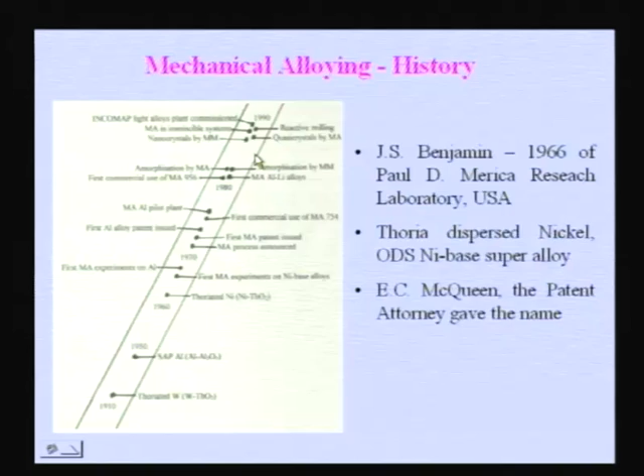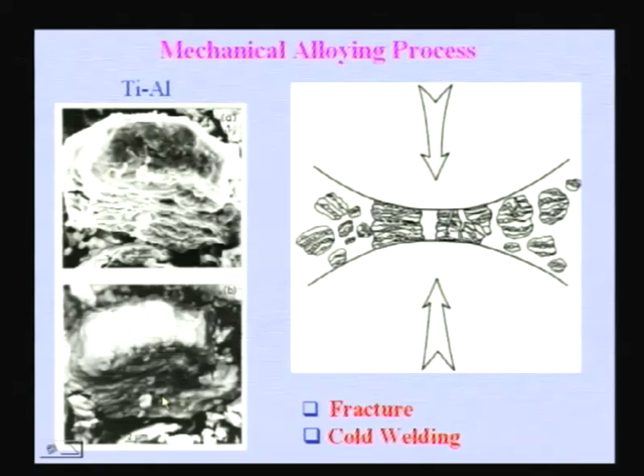Okay. So, this is how we can find out that there are different elements and alternate layers of these elements take place. And once you get that kind of things, alternate layers, any phase can form. We will come to what are the phases that can come out of such a mechanical alloying. Before that, let us look at what are the types of mills that we use.

One is called a vibratory mill. These are typical laboratory mills. There are two laboratory mills which people use usually. One is called a vibratory mill, which is where basically you take a box in which you put the powder and the balls and then shake it at a very high speed, something like 20 cycles per second. So, almost about 1200 RPM if you want to convert it into an RPM. So, you can have such high frequency impacts, because in each vibration there will be one impact at least. So, balls impact the powder.

So, this is a commercial ball mill called Spex mill. This is an American mill which is very often used, but the only problem with this mill is the quantity of the powder that you can use is very small, not more than about 20 grams. So, if somebody is interested to make slightly larger quantities, he cannot use this kind of mill.

The next ball mill which is very popular is what is called a planetary mill. This is one such planetary mill where you see a disc. The schematic picture is shown here. You have a disc there. This black one that you are seeing here is a disc, and on that you see 4 white colored jackets, and these are called bowls or vials, and these bowls rotate in a direction opposite to that of the disc. The disc rotates in one direction and the bowls rotate in the opposite direction, and that is why you can see the disc is rotating in this direction.

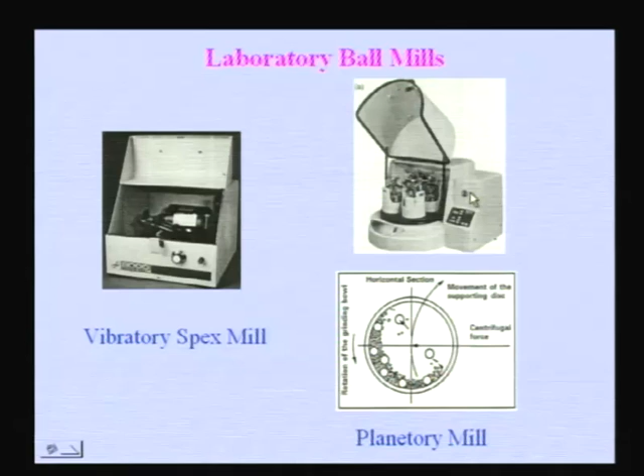So, whether we can use this kind of mill to produce either nanocrystals or amorphous materials or not is what people are studying nowadays. In fact, within 15 days we have a small workshop just to discuss whether we can produce commercial, large-scale ball mills where the energies can be as much as you can put into these laboratory mills, and if so, how to design such a ball mill where similar energies can be imparted. So, hopefully people will come up with some idea.

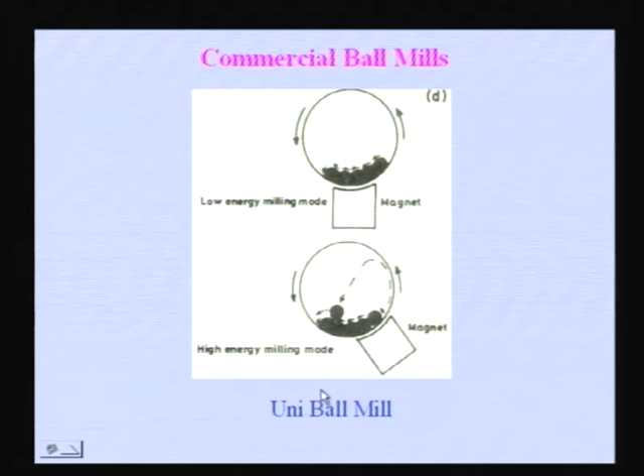So, the other type of ball mill is what is called a uni ball mill. This is a special type of ball mill which is different from the other ball mills, in the sense that here the actual energy is imparted because of the magnet which is kept here. So, you have a tumbler kind of mill here, a circular or cylindrical shaft in which you put balls, and you put a magnet here.

So, now depending on where you place the magnet, you start rotating the container, and the balls are taken to a higher position depending on the position of the magnet. If the magnet is exactly at the bottom, then the balls will not go very high, because the magnet is attracting these balls, which are basically steel balls. So, they will keep on moving there itself, and there is not much impact, but only some shearing process will take place.

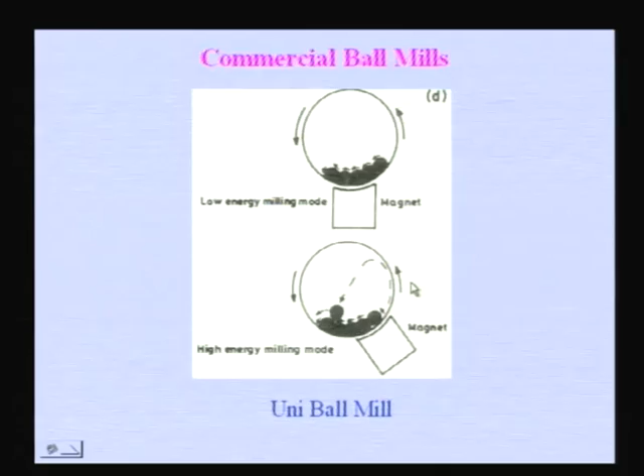So, one can control the mode of energy transfer, whether it is just shear or an impact kind of energy, by changing the position of the magnet, and that is why we call this a low energy mode and a high energy mode. If you put the magnet at some position here, let us say, you will get much higher energy. So, either shear mode or impact mode. Here also one can produce large quantities, at least about 5 kilos or so. So, these are the typical types of mills that we use.

And now, let us come to what you can achieve by this kind of mechanical alloying or milling process. Basically it is a defect induced process. You are breaking the powder particles into finer and finer particles, and during this fracture process you are introducing a lot of defects such as dislocations and vacancies, and because of these defects, phase formation or phase transformations are enhanced, because the diffusivity is enhanced.

In fact, people talk in terms of a special type of diffusion called pipe diffusion. Have you ever heard of pipe diffusion? If you have gone through a diffusion course, you would come across this. A pipe diffusion is a diffusion through dislocations. A dislocation is what? It is nothing but a row of vacancies, isn't it?

So you can imagine a dislocation as nothing but an empty pipe. It's like just a cylinder which is an empty cylinder, like a tube. So you can imagine a dislocation as a tube, where the diffusion can occur very fast. So if you have a large number of dislocations inside a material, diffusion can occur very fast.

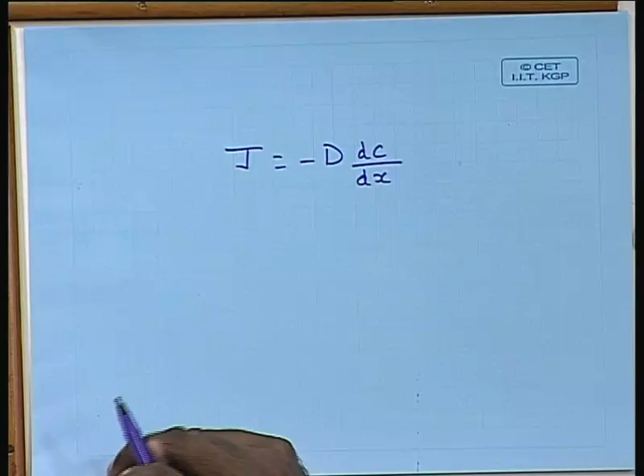So diffusivity depends on the temperature, we all know, and also the concentration, of course, because diffusivity we can think of as concentration dependent or concentration independent when we try to calculate it. All of you have gone through a diffusion course at some point of time, or some metallurgy course where you must have come across diffusion. Anyway, Fick's laws you must be aware of.

So basically people take diffusivity as temperature dependent, where D is equal to D naught into exponential minus Q by RT. So where temperature comes into picture, Q is called the activation barrier for diffusion and D naught is what is called the pre-exponential factor. So now dC by dx is very crucial in this kind of situation.

When you are decreasing the size, let us assume that in a ball milling you are forming alternate layers like this, A and B. If you are doing continuous milling, the thickness of A and B keeps on decreasing, because there is continuous breaking and rewelding taking place. Because of this continuous thickness decrease, the dC by dx increases tremendously, because the dx is decreasing.

As you can see, the dx is nothing but the diffusion distance, the distance over which diffusion has to occur. In a layered structure like this, the diffusion has to occur in this thickness, isn't it? So if that thickness can be reduced, then dx is decreased, and if the denominator decreases, the whole fraction increases tremendously, and as a result the flux increases.

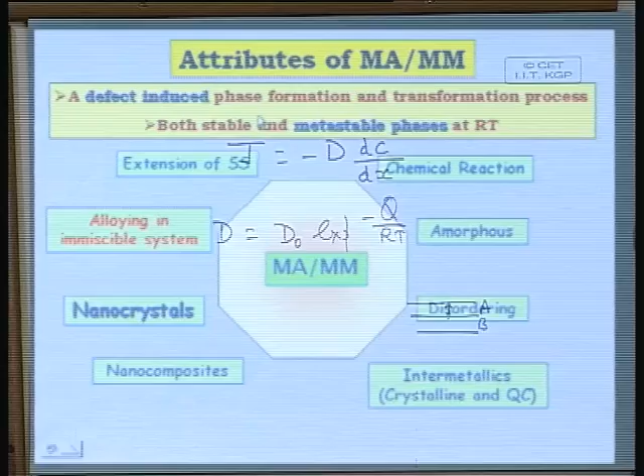So that is one of the reasons why you have defect induced phase formation and transformations, which get enhanced because of the defects and the decrease in the size of the crystals during ball milling. And because of this, you can have stable phases and metastable phases forming at room temperature. This is very crucial. All these phases are not happening at high temperature, they are happening at or close to room temperature.

We will talk about the temperature during ball milling at some point of time. Okay, so you can take it for granted that the temperature is more or less close to room temperature. So all these processes occur near room temperature. So what can happen?

As I told you, it can give you nanocrystals, and it can give you nanocomposites if you are putting in more than one type of material. For example, if you take a nickel based alloy, nickel and yttria, you can break it to a very fine size, and ultimately if the energies are high enough, you can make a nanocomposite of nickel into which you have yttria.

So you can make nanocomposites, and you can have what is called alloying, and because of that alloying you can have extension of solid solubility. In rapid solidification processing, we have talked about extension of solid solubility. Similarly, here also we have extension of solid solubility. In rapid solidification processing, the concept which tells you about extension of solid solubility is the T0 concept. We have talked about the T0 concept.

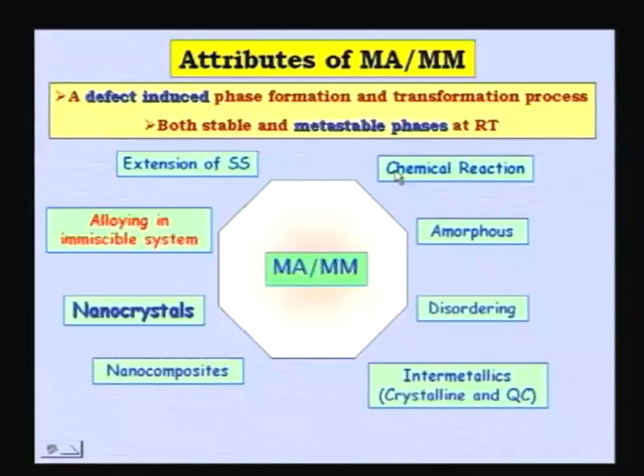So if you want to introduce some ductility into a compound, you can take an ordered compound and put it into a ball mill; one can make it disordered, one can make it completely amorphous, and one can also introduce chemical reactions. So these are all things one can do, and these are some of the examples.

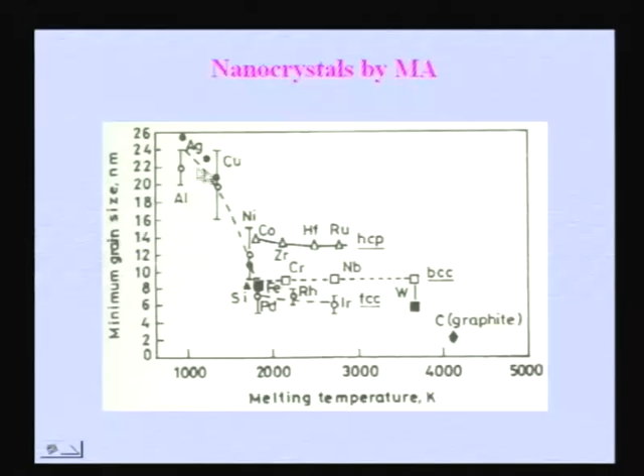Nanocrystals one can make. This is in the metallic system, this is in the oxide system, PZT, and the crystal size that you can achieve by mechanical alloying is always a function of melting point. The higher the melting point, for example graphite and tungsten have very high melting points, the lower the crystal size one can achieve. Whereas if you take aluminium, copper, silver, they cannot have very low crystallite size. You have a high crystallite size.

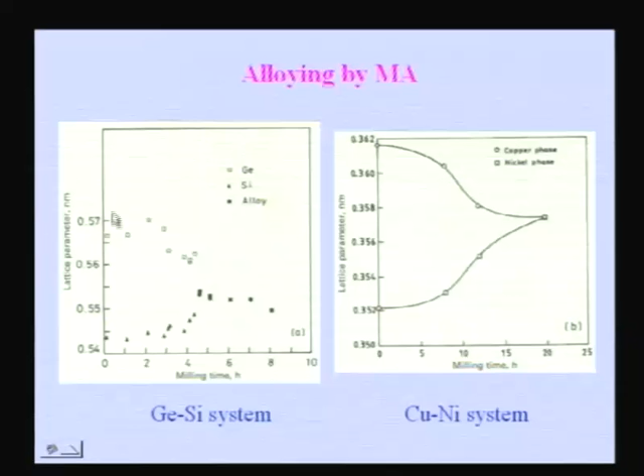Similarly, this is germanium silicon: this is germanium, this is silicon, one increases, another decreases, and finally you get an alloy. And this tells you how much solubility you can achieve. This is iron copper. Iron copper is supposed to be an immiscible system. A lot of people are working on these immiscible systems now, particularly to put a small amount of copper into iron. In interstitial free steels, a lot of people want to put small precipitates of copper, particularly nanocrystalline copper, into iron, so that they can increase the strength of the interstitial free steels.

So if you look at the equilibrium solubility, it is only 0.3%. Only 0.3% of iron can go into copper under equilibrium conditions. By rapid solidification one can go to 20%. By evaporation 35%. By sputtering about 50%. By mechanical alloying one can go to 68%.

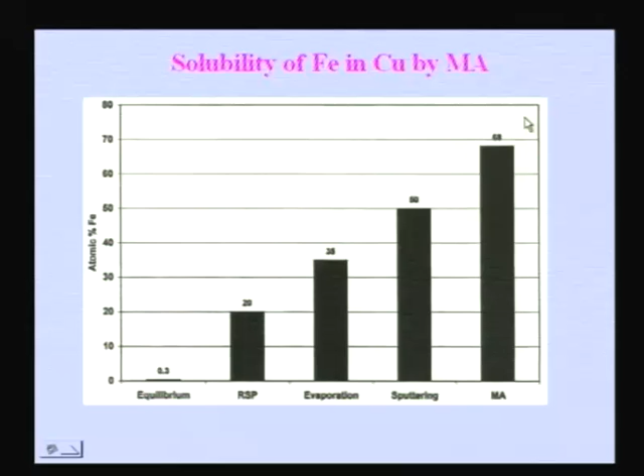You can imagine from 0.3 you are going up to almost 68%. So this is all because you are just forcing the atoms to come together. So that's an advantage of mechanical alloying. And similarly, I told you earlier, nanocrystallization is a prerequisite to alloying. We have talked about it when we were talking about nanocrystals. I thought we will just bring it here because this is something to do with mechanical alloying.

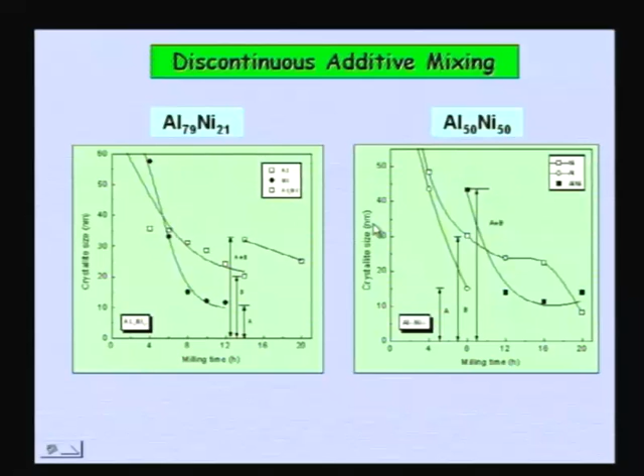So, this is another mode of alloying which occurs during mechanical alloying in case of ordered compounds, not for solid solutions, but in case of ordered compounds with high negative enthalpy of mixing, you get this kind of discontinuous additive mixing. And one can have extension of phase fields in the intermetallics also. We talked about extension of solid solubility in solid solutions, but one can have extension of solid solubility in intermetallics.

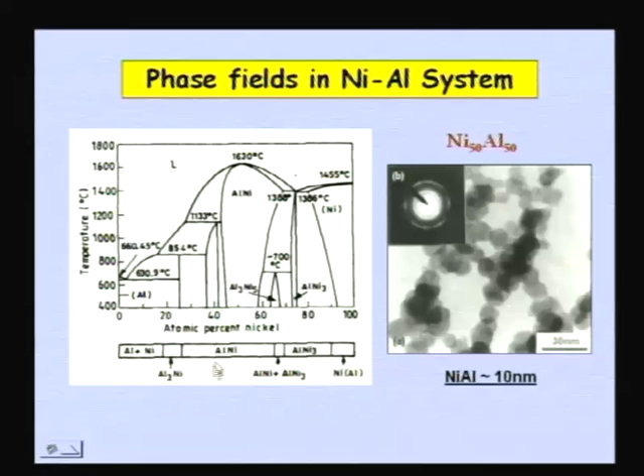For example, NiAl is one such example, where under equilibrium conditions you get a solubility from 45% to 55%. Here you can get from 25% to 65%, a very large extension, and it is all because of nanocrystals. And one can show that when you make it nanocrystalline, the phase field becomes much larger. This is very easy to show.

And one can introduce disordering, but the extent of disordering that you can introduce into ordered compounds depends on the ordering energy of that compound. How ordered is that particular order? If you compare some intermetallic compounds, for example, let us take beta brass. Beta brass is ordered at room temperature; if you start heating it, once you cross a particular temperature, what temperature is that? About 450 degrees centigrade, it becomes disordered.

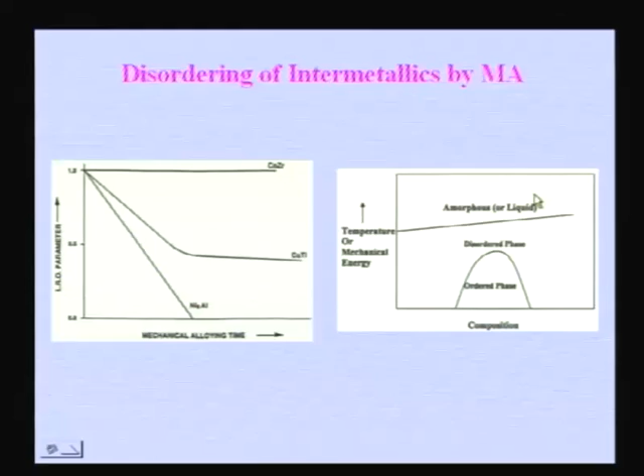So, similarly here there is an analogy between the temperature and mechanical energy. If you keep on increasing the mechanical energy, the ordered phase becomes disordered, and this disordered phase, if you keep on increasing the mechanical energy further, becomes amorphous, which is similar to the liquid. So, this is similar to what happens if you keep on increasing the temperature: an ordered phase becomes disordered and becomes liquid. Instead of liquid, with mechanical energy it becomes amorphous. So, that is one way one can do it.

And one can talk in terms of what happens when you put these powders into a ball mill and look at how various milling parameters affect the type of phases that are forming. This is one such example which tries to show you different milling parameters in ball milling. One is the speed of the mill, the RPM, and the ball to powder weight ratio. So, if you are increasing the speed of the mill, definitely you are increasing the energy, isn't it?

And if you are increasing the ball to powder weight ratio, that means for the small amount of powder, if you have more number of balls, then the possibility of a ball hitting another ball increases. That is one possibility. At the same time, there are less number of powder particles which receive impacts. So as a result, the possibility of each powder particle receiving more impacts also increases, and because of which the total energy transferred to the powder over a period of time increases. As a result, the higher the ball to powder weight ratio, the higher the energy transferred.

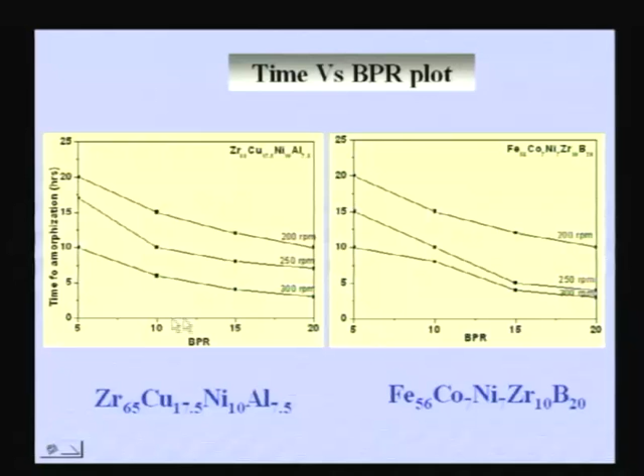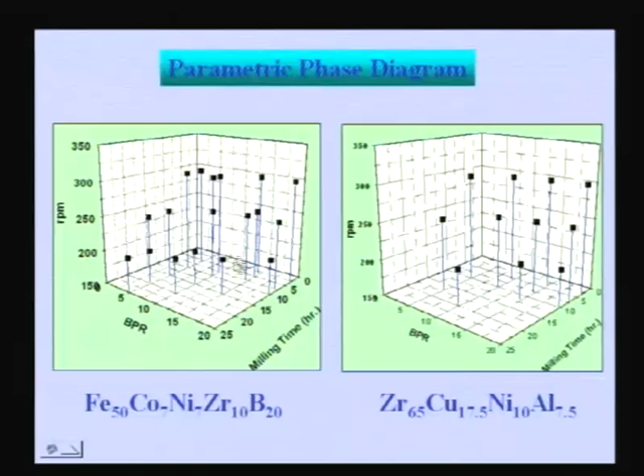This is one such example where you can see the time required for amorphization keeps on decreasing as you increase the speed 200, 250, 300 RPM, and as you increase the ball to powder weight ratio, and this is for two different systems. And similarly, one can put the RPM, ball to powder weight ratio, and the time required for amorphization, all of them together, and see basically similar results.

And again the time required for amorphization, if you look at various systems, one can see that at very high milling energies, that means high ratios and high RPM, the overall time required for amorphization is the same irrespective of the system that you choose. When you are putting in so much energy, every system becomes amorphous very easily. As I told you, if you use a laser for rapid solidification, even a pure metal can become amorphous.

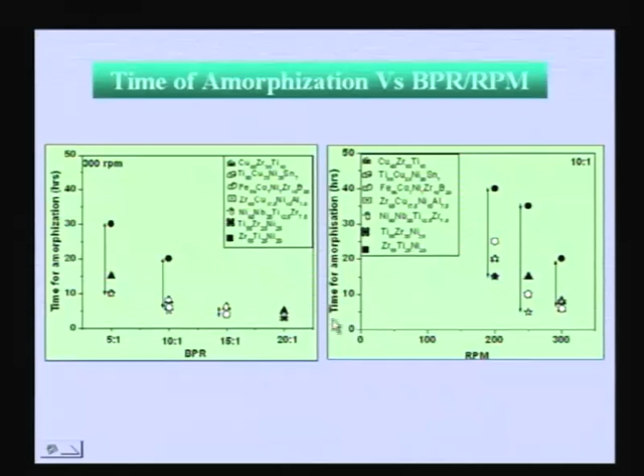So whether it is an easy glass former or a non-easy glass former, both of them will easily become a glass when you use very high cooling rates of the order of 10 to the 12 or 10 to the 14. Similarly, when you are putting very high energies, whether it is an easy glass former or non-easy glass former, for example here when you are putting small amount of energy, the easy glass former will take less time, a glass which is not an easy glass former will take more time. But when you are putting very high energy, all of them more or less take very low amount of time.

And one can put all these into energy parameters. There are basically two energy parameters during ball milling. One is called impact energy, which is called EB, ball impact energy. That means when a ball is hitting the powder, what is the energy of the ball? How do we know that? The impact energy of the ball is nothing but half mv square. So if we know the mass of the ball, if we know the velocity of the ball, one can calculate half mv square.

And in addition, one has to consider also ball to ball impacts, because some energy is lost when a ball hits another ball. So because of which the effective energy transferred from the ball to the powder is decreased. So we multiply with a parameter called phi, and that decreases the overall impact energy of the ball. So this EB star is nothing but the effective impact energy of the ball, and one can calculate phi b very easily depending on the extent of filling of the container and the ball to powder weight ratio and things like that.

And the total energy of the ball is crucial. Total energy of the ball is nothing but the impact energy of the ball, number of balls, the frequency of impacts, and time of milling. All of them will come in the numerator, and the weight of the powder comes into the denominator. That means if you put large amount of powder, then the total energy transferred for each powder particle obviously decreases, because there are too many particles to receive the impacts. If you have less number of powder particles, then each particle receives more number of impacts. So as a result, the total energy transferred to the powder particle is more.

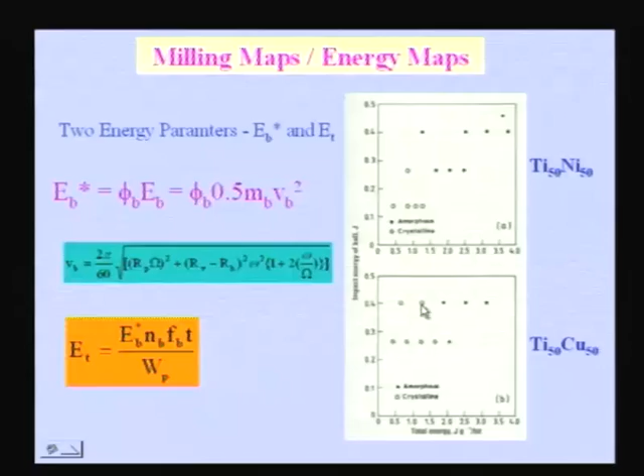So if you put a vertical line like this, below that line all are white circles, that means they are crystalline, they have not yet formed amorphous, and beyond that line you have amorphous phase formation. That means there is a critical energy, so the actual impact energy of the ball is not crucial. What is the total energy transfer to the powder over a period of time, that is crucial for any phase formation. And one can do this for various glasses.

This is another ternary kind of a glass where a nanocrystal becomes a glass after certain period of milling, and again here also you can see there is a minimum total energy beyond which you get a glass. But interestingly you can see these half filled circles, meaning that the amorphous phase that has formed in this domain crystallizes when you put very high energy. This is also another interesting thing.

Any amorphous phase that forms is not a stable phase; it transforms into a crystal when you heat it, because we know whenever a glass is heated, a glass becomes a crystal. So similarly, when I am putting in more and more energy, more and more defects are coming into picture, and these defects enhance the diffusivities, and because the diffusivities are so enhanced, crystallization can occur very easily even without

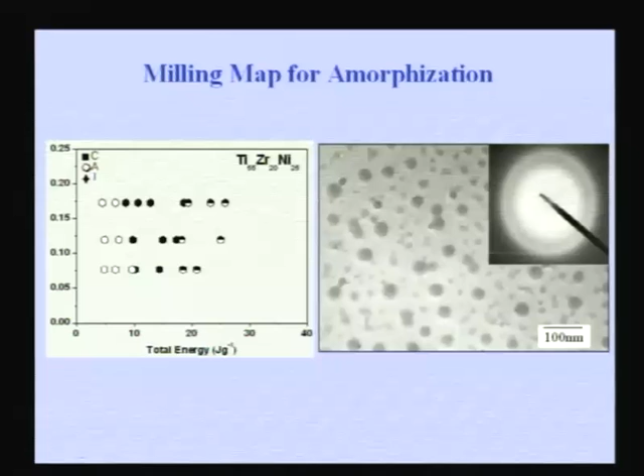increasing the temperature. So the amorphous phase can become a crystal in situ in the ball milling itself without taking it out and heating it in a DSC or doing an annealing. So this is kind of in situ crystallization. So one can do all that, and one can also show that there are milling maps for intermetallics. This is one such intermetallic NiAl.

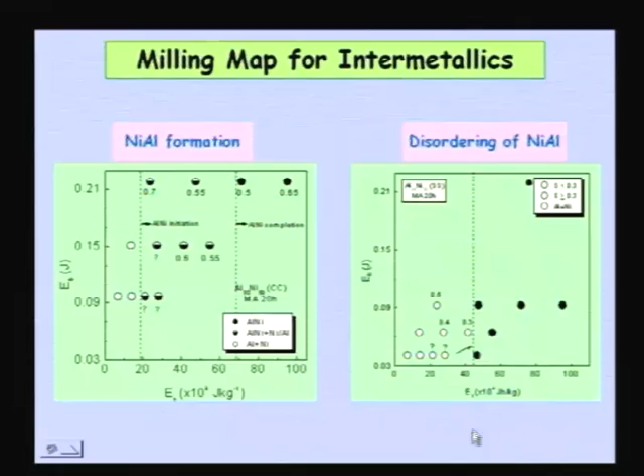You can see that irrespective of the impact energy of the ball, there is a minimum total energy where the initiation of the AlNi phase formation occurs, and a minimum energy beyond which there is a completion of the reaction. Similarly, there is a minimum energy beyond which complete disordering of the ordered NiAl occurs, below which the order parameter is higher than 0, and beyond that the order parameter becomes 0. So suddenly complete disordering occurs, and that is again a function of the energy.

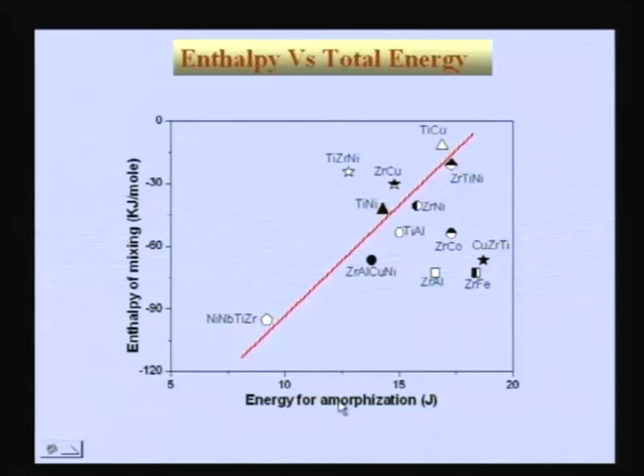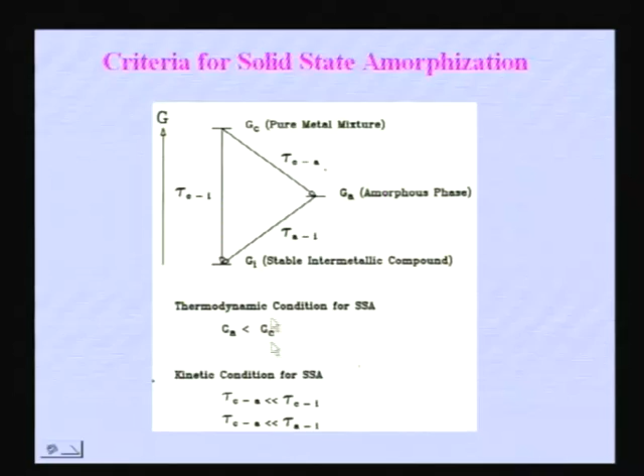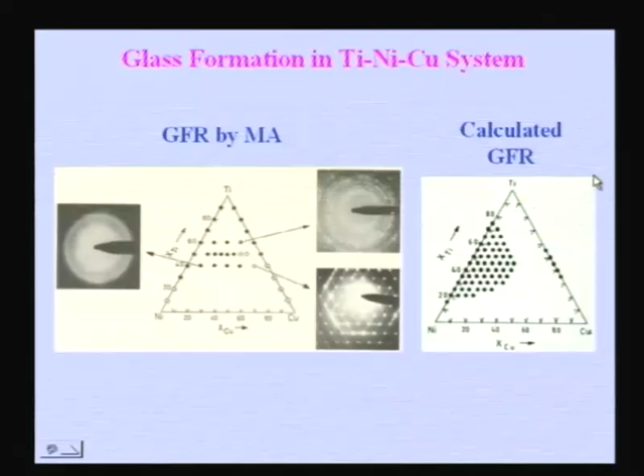And one can correlate the energy required for amorphization to thermodynamics. One can do similar thing for any phase formation. There is always a direct correlation between thermodynamics and the energy required for any phase formation. We have talked about the criteria for amorphization: thermodynamic criteria, kinetic criteria, the critical strain required for amorphization to occur, and the calculated glass forming ranges, which can be compared with the experimental glass forming ranges.

And this is another interesting thing. This is a nickel niobium system, where we are showing you the glass forming ranges that you can get by different techniques. The big hatched ones are all amorphous composition range. That range is very small for splat quenching, which means gun quenching. And then RF sputtering, laser quenching, ion beam mixing and mechanical alloying. Mechanical alloying shows you very wide composition range, so the glass forming range can be very wide.

An interesting thing is also that by the liquid metallurgy route, that means if you use rapid solidification, glass formation always occurs near the eutectics, particularly near deep eutectics. Why? Because that is where the liquid is stable, and that is where the Tg is close to the TL, and that is why we have talked about glass forming criteria such as Trg, the reduced glass transition temperature, that is very high at the eutectic temperature.

So that means in the case of nickel niobium, around 60% is a composition where you can easily get a glass by splat quenching. For example, you can see this is the range by rapid solidification, whereas in the case of mechanical alloying there is no such restriction. You can get it over a wide composition range.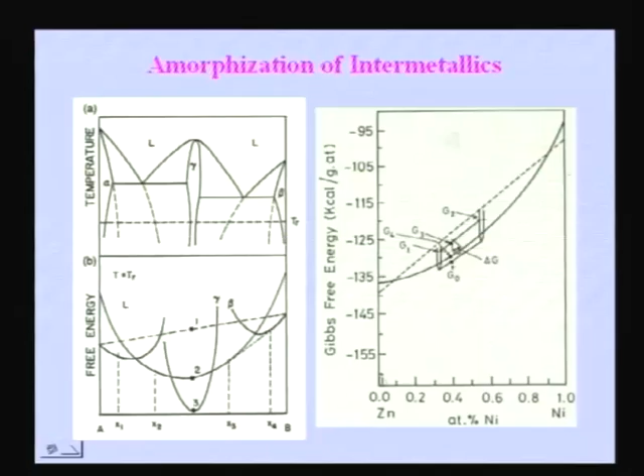And when you take a mixture of two intermetallics, one is this intermetallic, another is this, and the solid curve here is the free energy of the amorphous phase, the mixture of the two intermetallics always has the lowest free energy. If you start ball milling, the free energy of the intermetallics goes up, and after some time of milling, the free energy of the mixture becomes equivalent to G3. From G3 to G4, the free energy of the amorphous phase, there is a driving force, so now the transformation can occur. Directly from the mixture one cannot have amorphization, so one has to put in defects so that the free energy goes up.

When you deform the individual metals, copper cannot be easily deformed compared to tantalum. Tantalum has a higher melting point, so you can make it nanocrystalline much more easily. As a result, it becomes finer much more easily, so its free energy goes up to a much higher level than that of copper.

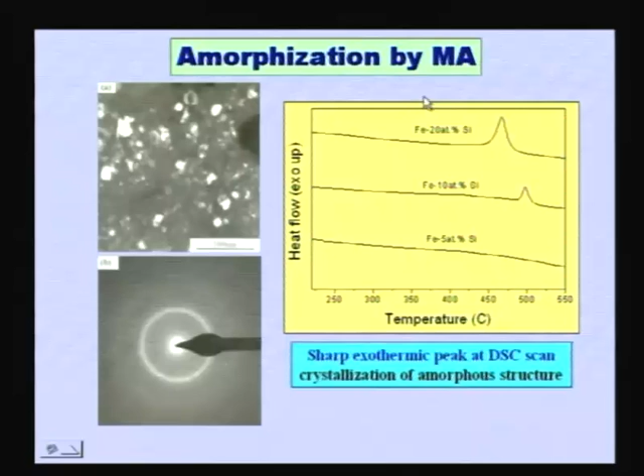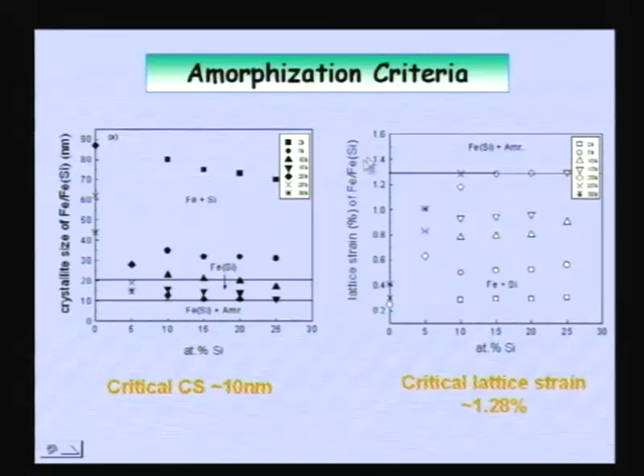This is not possible by rapid solidification, and one can have amorphization by mechanical alloying below a certain crystallite size. We have seen this before. When you bring the nanocrystals below a certain size of about 10 nanometers or so, suddenly it becomes an amorphous phase, and similarly beyond a certain strain it becomes an amorphous phase.

And similarly here is an example of the effect of cryomilling. When you start ball milling at room temperature, this is a cobalt zirconium, you cannot bring the crystallite size to very low level. The crystallite size is only about 10 nanometers or so when you ball mill it at 30 degrees or 60 degrees or 200 degrees. These are all milling temperatures. But if you reduce the milling temperature, do cryomilling, for example minus 85 degrees and minus 190 degrees, the rate of decrease in the crystallite size can be very fast. So as a result, you come below that critical crystallite size, so that amorphization can easily occur. So cobalt zirconium can become amorphous very easily.

So similarly you can see, the time required for amorphization is inversely proportional to the melting temperature. The lower the melting temperature, the slower the amorphization will occur.

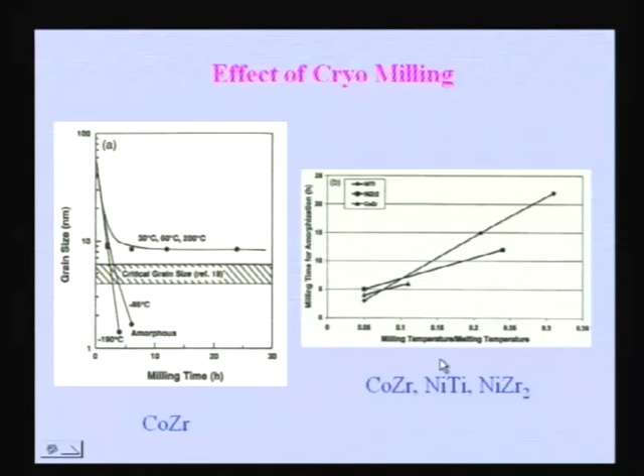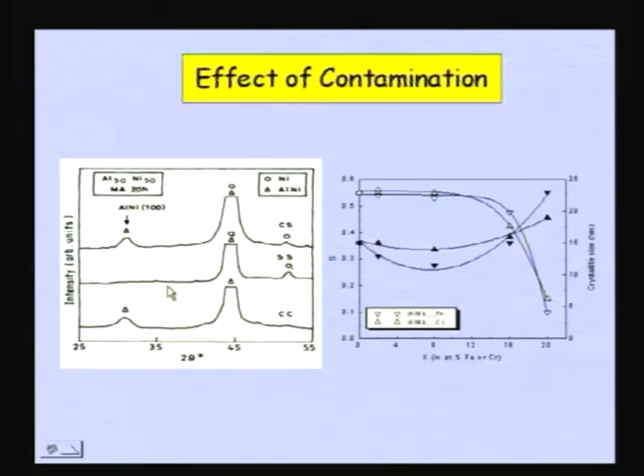And this is the effect of contamination. We know that contamination is one of the major problems by ball milling, but sometimes contamination can be useful. We have talked about it at some point of time. Here contamination can lead to what is called disordering into a compound. If you ball mill NiAl in tungsten carbide, you get an ordered superlattice reflection, but if you ball mill it in a stainless steel, you will never get a superlattice reflection. That means it is completely disordered. That is because of the iron contamination, the iron coming from the balls and the container, it goes into the NiAl and reduces the ordering energy, and because of which the ordered NiAl completely becomes disordered. And once it becomes disordered, it becomes ductile.

And another last point is the temperature of ball milling. A lot of people have studied this temperature. Initially people thought the temperature will be very high, but later people thought about it a lot and did a lot of modeling and also some experiments. There were some very ingenious experiments, such as putting martensite into the ball mill, doing ball milling and trying to see what is the microstructure of this martensite after some time of milling. And we know that martensite gets tempered to various different structures depending on the temperature of tempering. So if we look at the tempered structure, we can find out the temperature during ball milling, the temperature at the impact of the ball to the powder. So people had a look at that and could see that the temperature never goes beyond about 300 degrees.